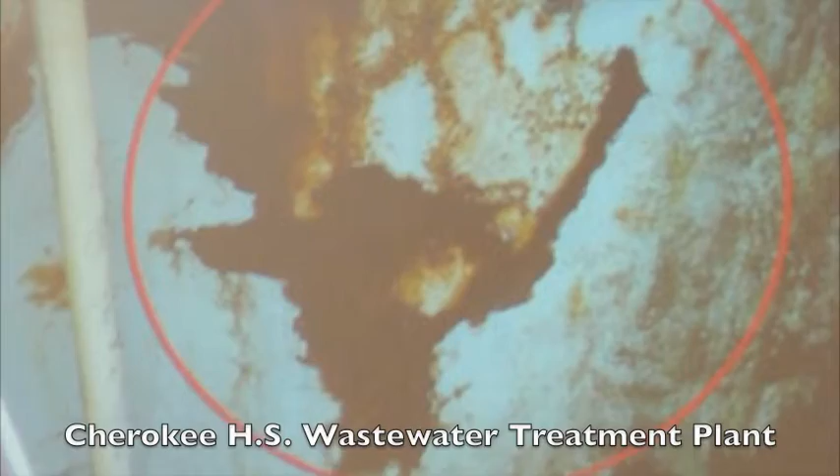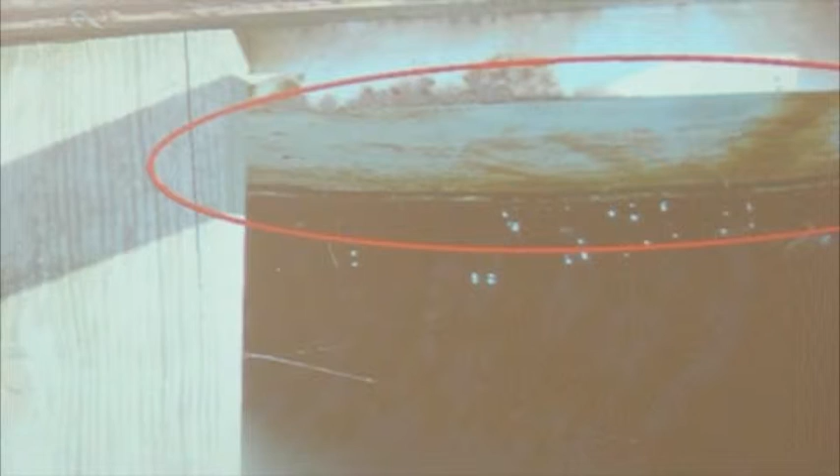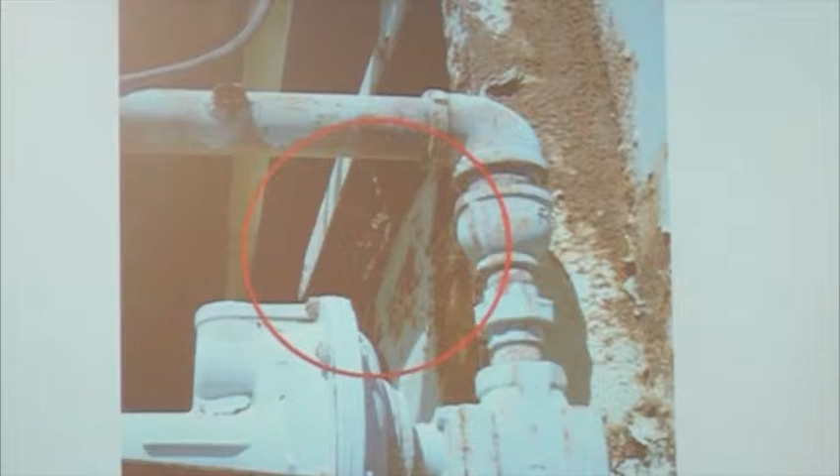So with that being said, I want to reassure everyone that we are diligently looking at ways where we can save substantial sums of money, and unfortunately this isn't one. And you can be the judge for yourself looking at these pictures. You can see the region that is circled there is there's a slight bow in that wall. This area right here, you'll see that this was a big steel I-beam. The I-beam is completely rusted in two, and portions of it there.

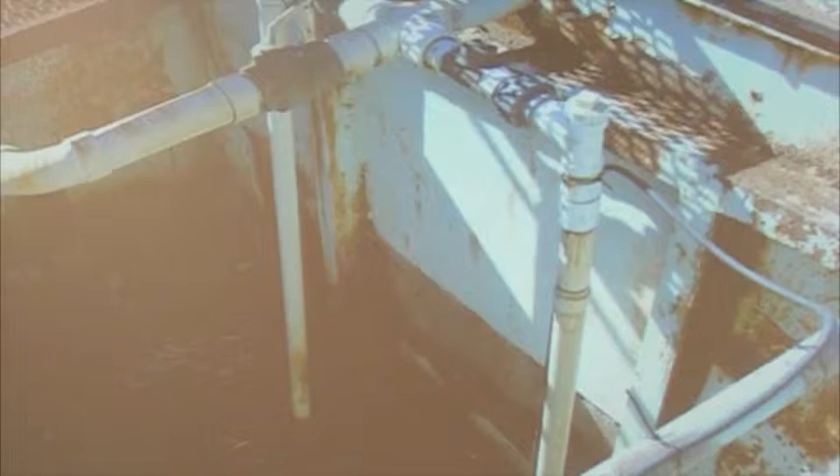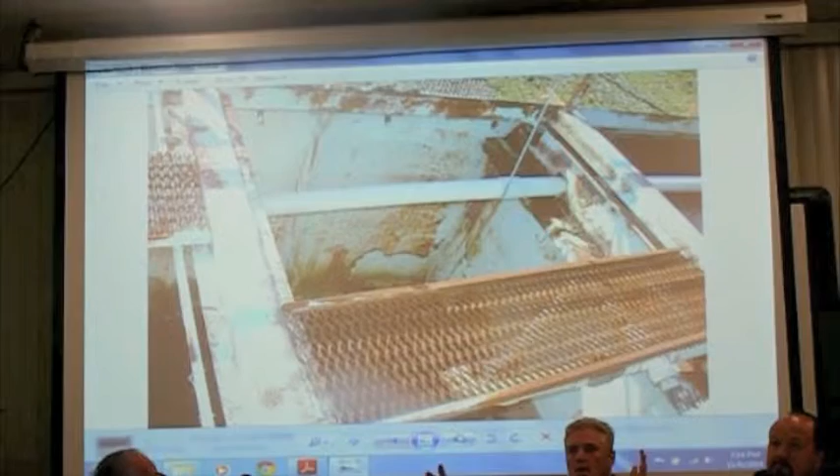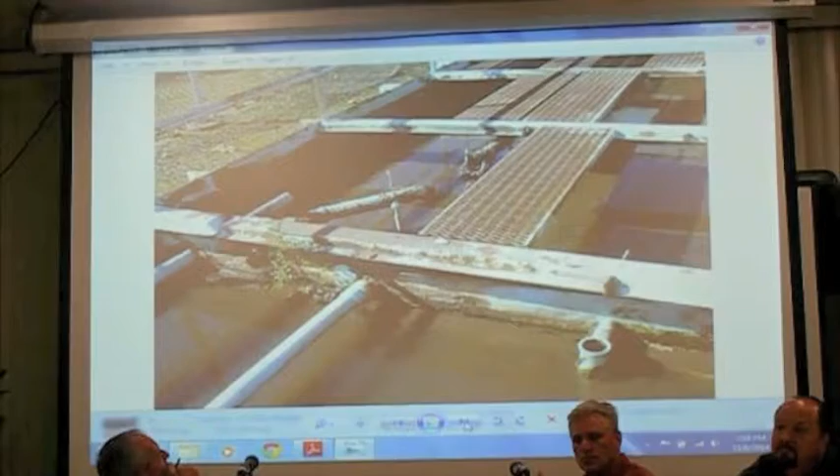For those of you that really can't see, the pictures don't do it justice, but this is a big, long, metal trough, 14 feet deep, 100 feet or more long, and compartmentalized. 20 foot wide, and it's got walls separating it. You've got the wastewater coming into this first pond, let's call it, and this wall that separates them. These walls are starting to buckle and disintegrate, and that's where our problem comes in.

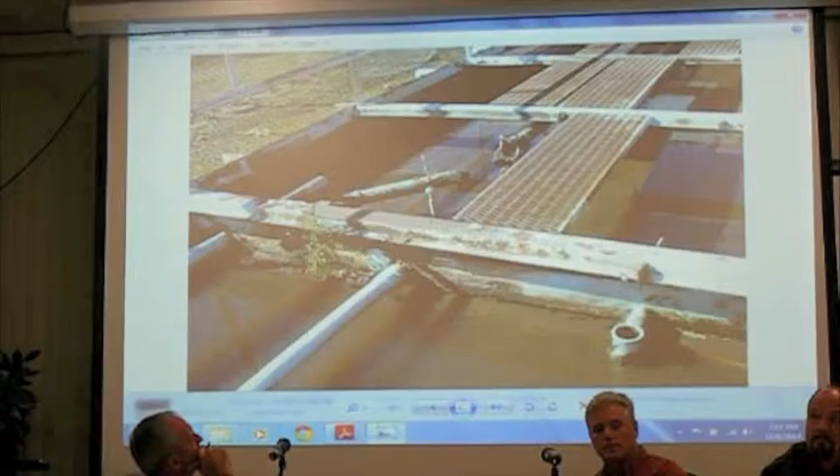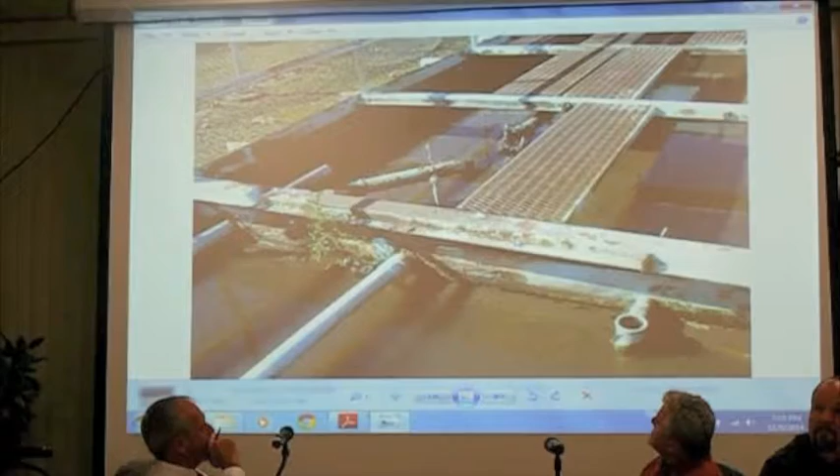And Mr. Blythe, you can jump in here anytime if you feel like you need to. And if these walls buckle, that would cause us to probably have to start pumping with trucks, and that could be very problematic and costly. If any one of the bulkheads goes in between the compartments, you do have to start pumping, because the first circled bow wall that he showed was actually where the raw sewage comes in from the school. The rusted I-beam is actually what separates that raw sewage from your sediment tank, which is the second one.

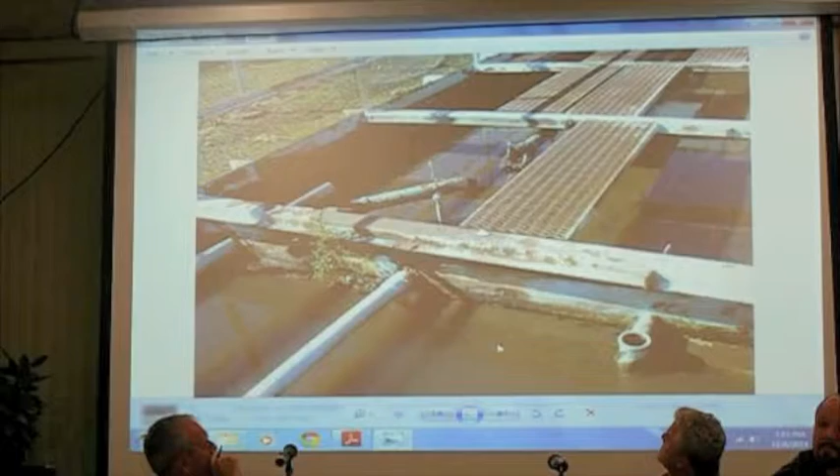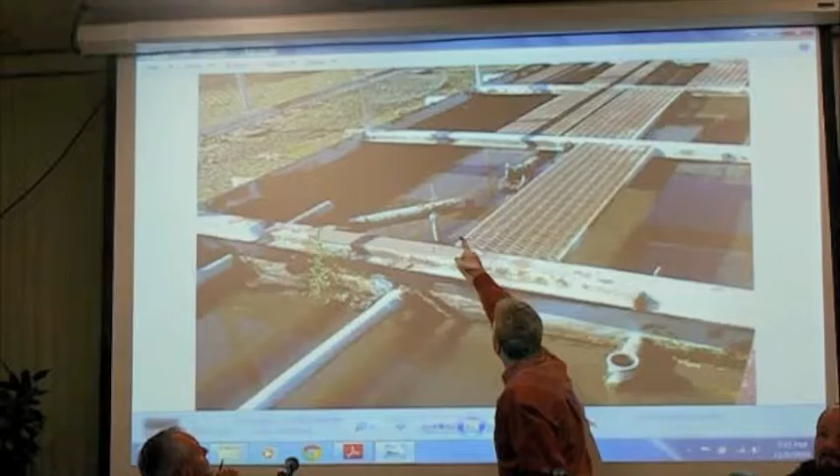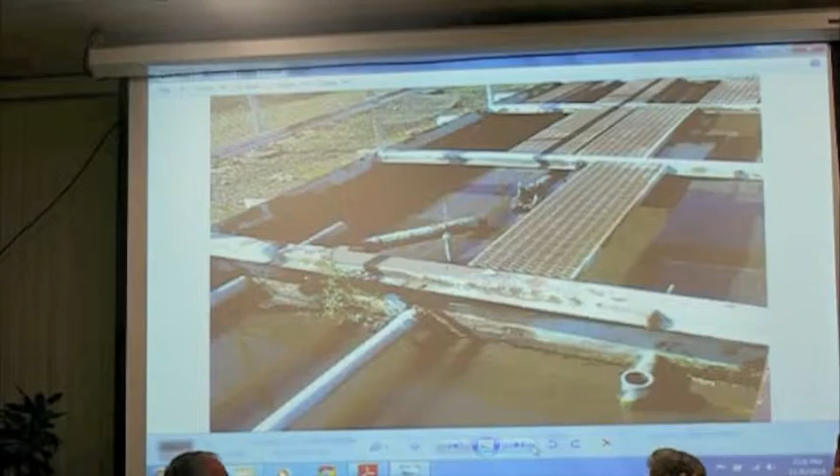At that point, that water is considered septic. It's not raw sewage anymore, it's actually septic because it turns septic. It's just like a septic tank. You can't just dispose of it like you can raw sewage. And if you notice this broken pipe, that pipe broke because one of the walls did buckle. Is that correct? Yes, that wall where he's got his pointer now is actually between the sludge tank, which is that one, and the sediment tank, which is the next one. That wall is actually totally detached at the bottom, so we can't pump the sludge out of it.

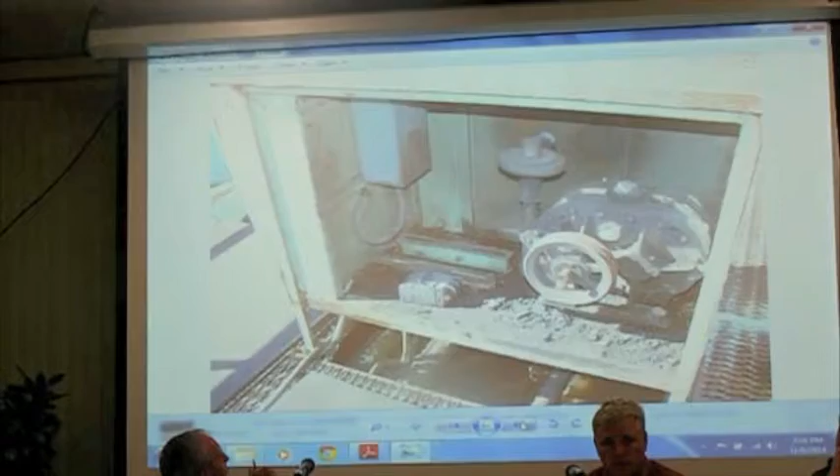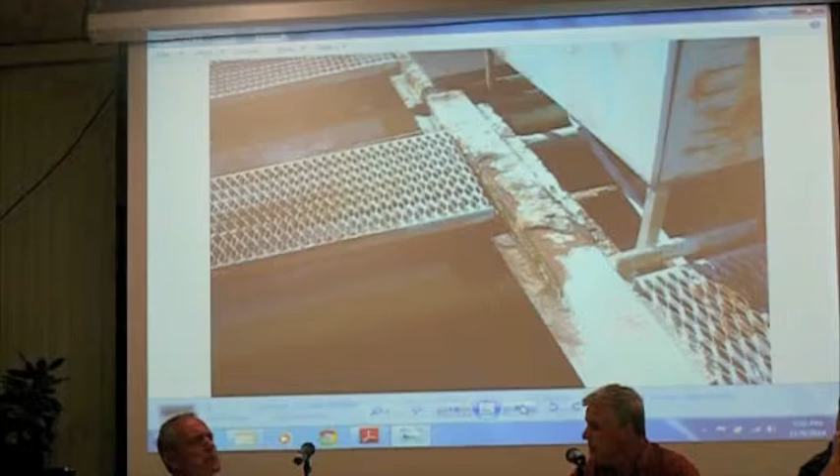After evaluation, I had never seen this septic system until that meeting on Tuesday. We went over there and had an opportunity to evaluate it, to take a look at it for ourselves. And I think some other members of that meeting, Mr. John Metz and some other county commissioners, went and took a look at it also later in the week, and they were in agreement that we need to move forward with this. Although I personally would like to see us on the sanitary sewer system, I just don't think our timeline can allow that at this time.

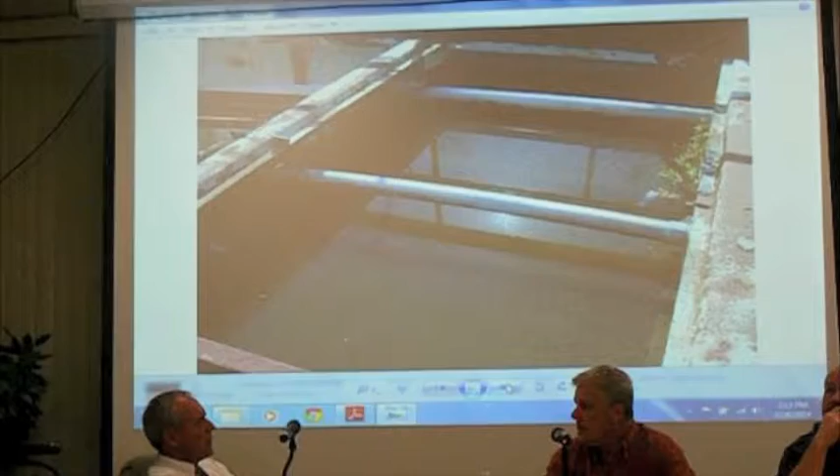So I wanted to give that information out to the board and the public to let you know where we're at, and if 10 years from now there's a sewer line out there and they're saying, well, why didn't you hook onto it? Well, we'd like to, but it wasn't there, and we've got to do something now.

After 34 years of use, it has exceeded its life expectancy, but we are in compliance at this time. We have somebody that's trained every day that goes over there and tests. We also have Mr. Sean Hatchett, who is a certified sewer operator that does testing for us. So I do want to stress that we are in...